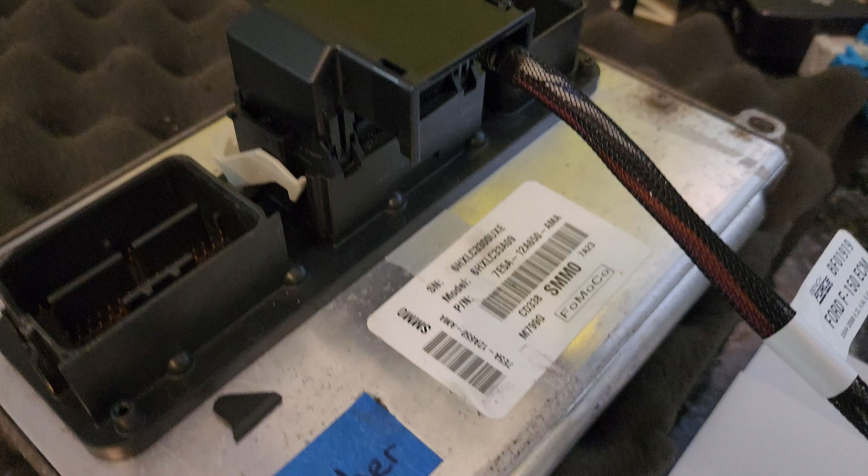Okay, Tanner, the PATS delete is done. Still working on the same SMM0 computer. It's already been forward programmed, and now it's been custom tuned with that custom tune that you and I built, that we discussed over the phone. And I'm starting from scratch with FORScan, so you can see me start it up.

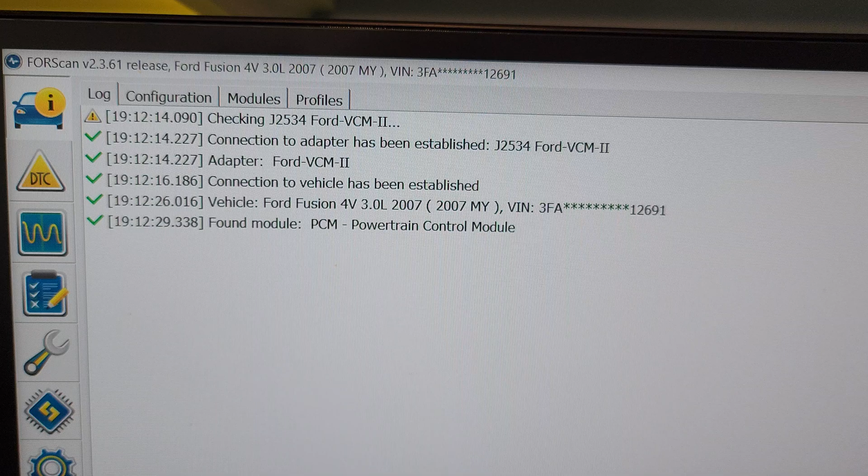Not starting with a specific profile, picking Ford Fusion. And there it's identifying the car. Okay, let's start with the configuration. 07 Fusion, the same VIN 3 times in a row, ending in 212691. Strategy IEAJ OAY. Do I just save this profile? No.

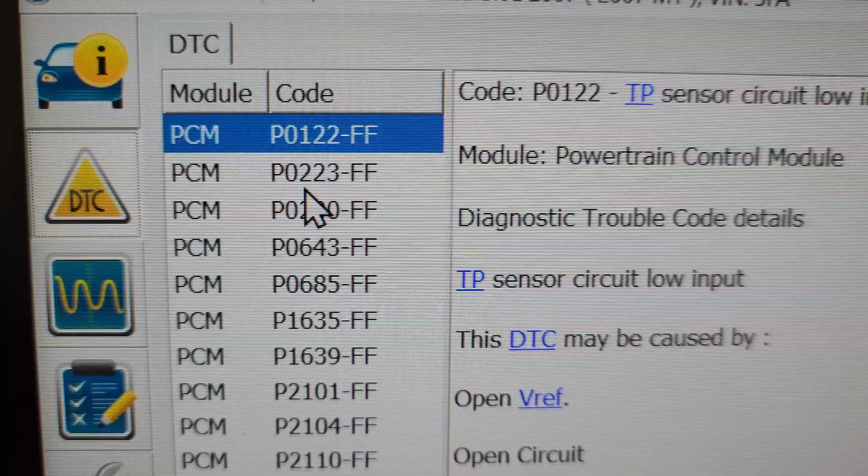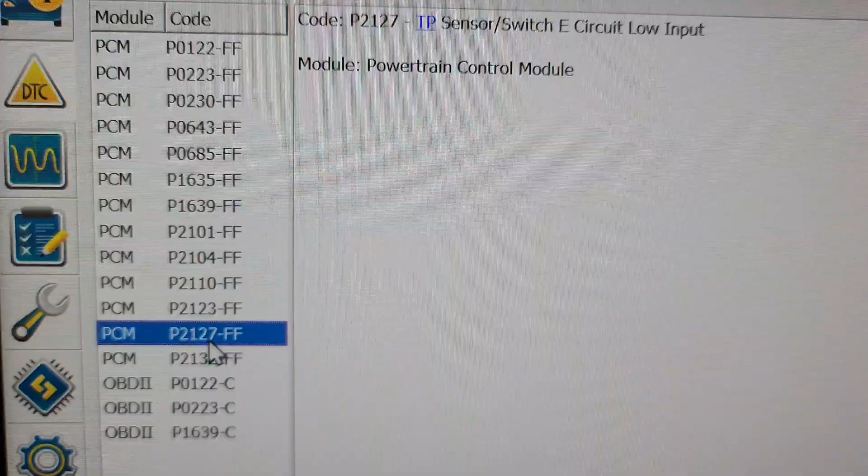Okay, now we're going to go to the codes. Okay. There's nothing here about PATS. No P1260. Then we're going to go to this screen here. We're going to select our PIDs. First, we're going to look for PATS enable, which won't be here.

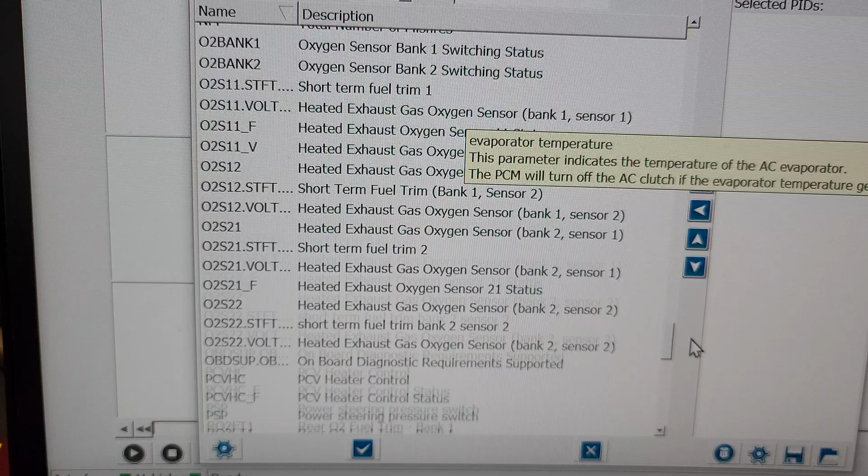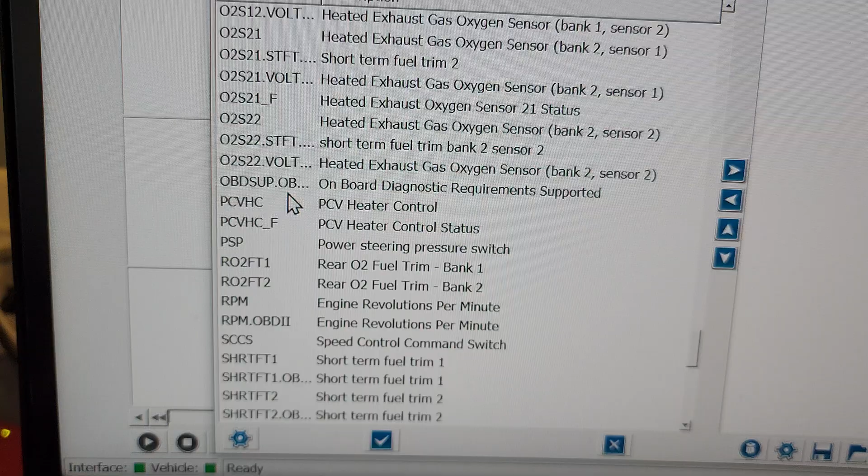Should be right here, but it's not. They're in alphabetical order. It's not there because this computer doesn't think you have PATS, so there's no parameter to choose from with that. Torque source goes to more things than PATS, so torque source is still here. So we select torque source.

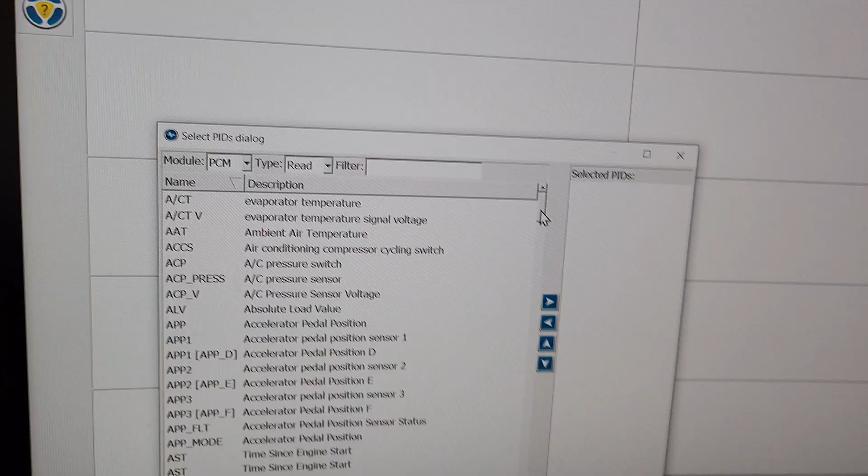And then we hit the... Did I do that all right? No, I didn't. Try that again. Select torque source. Torque control, another name for it. Why is that not selecting? Double click, there we go. And then hit check. Now we got torque control. And as you can see, there is no PATS to choose from. PATS enabled PID just no longer exists.

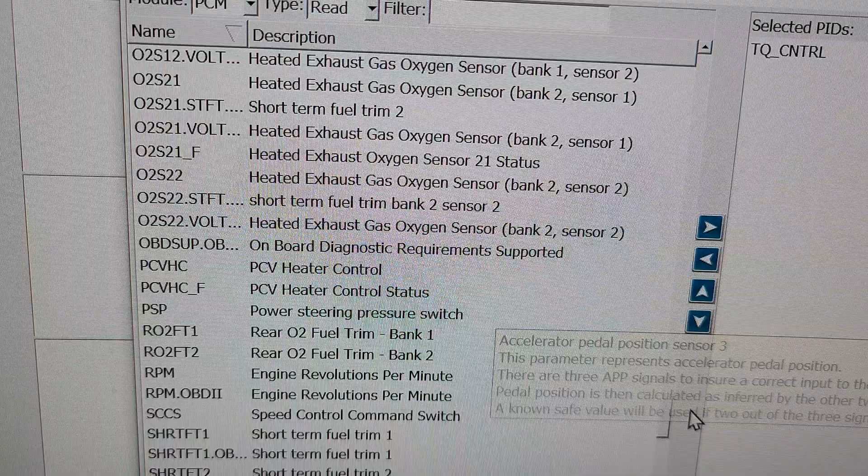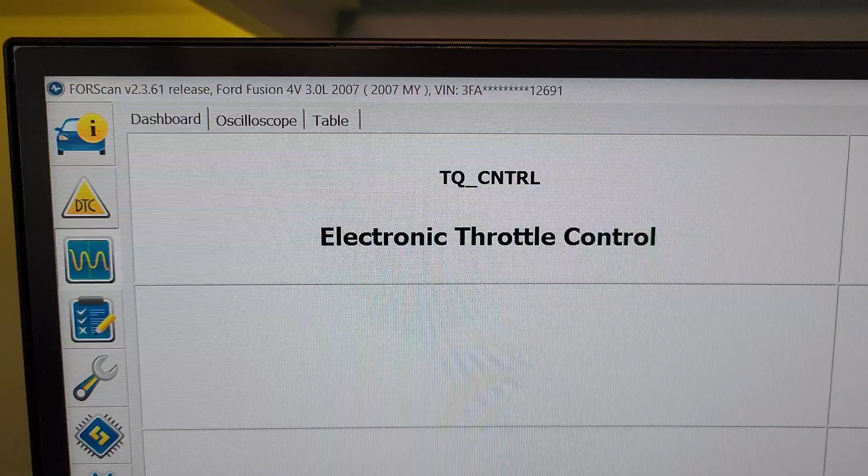Okay. Now I hit play. Stop. Play. Stop. Play. Electronic throttle control. Now, I take notes of this all the time. So here's your first one that we did way back in December 24. You can see the notes. These are the codes that popped. P0600 and U0300, they kind of pop them and flashing all the time. They're not really quite directly related to PATS, but we still check them.

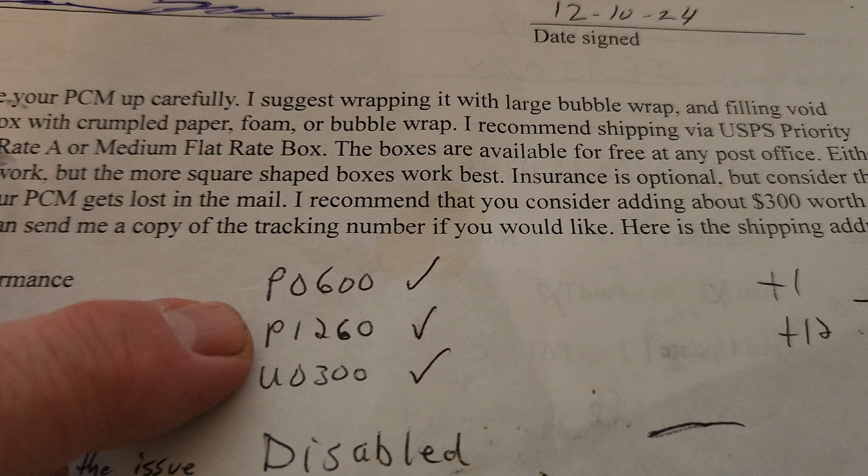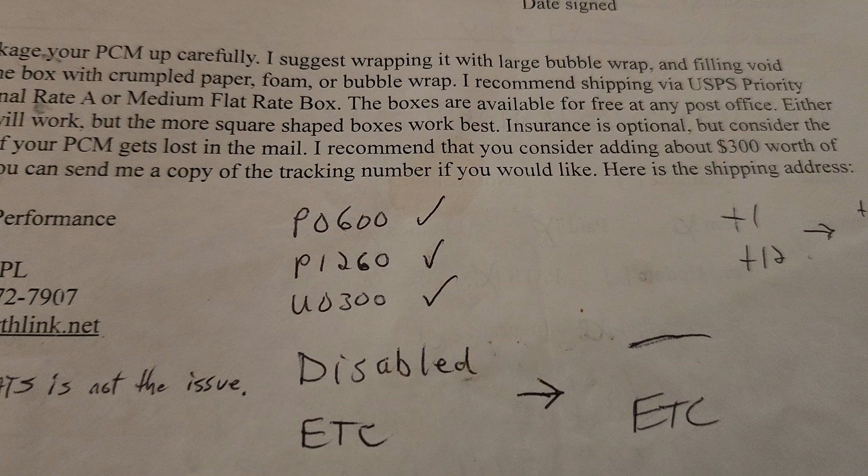Code P1260 is related to PATS, and when I put a check mark there, that means it's no longer there. Went from disabled to blank, nothing there. Electronic control stayed electronic throttle control. That's normal. Okay. Some cars have anti-theft as electronic throttle control, but anyway, nothing there. That's how that was the first time it came.

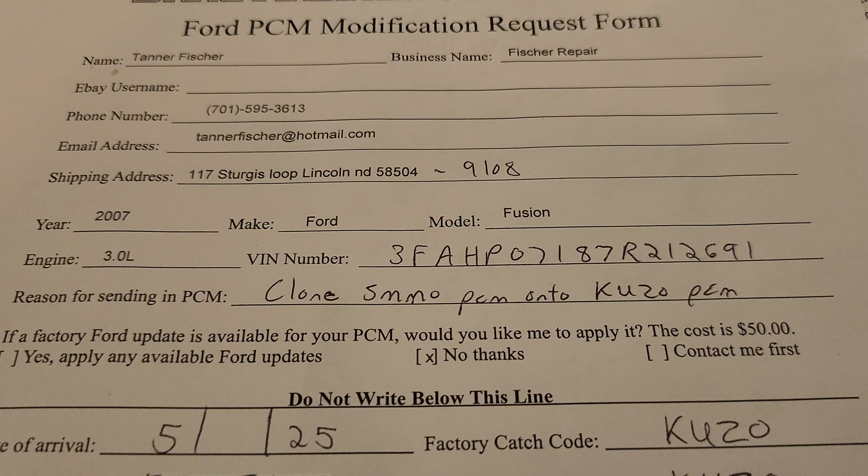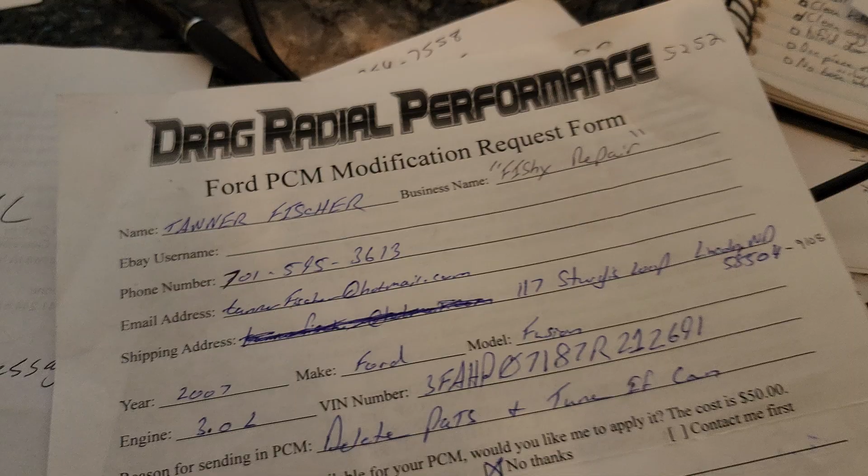Here's the paperwork from the second time it came in May. You can see that I had the same notes on there. 1260 is gone. PATS disable is gone. Anti-theft went to electronic throttle control from anti-theft. So, all gone. Okay. So your two pieces of paperwork. There it is. There's no PATS. There's no PATS parameter to choose from.

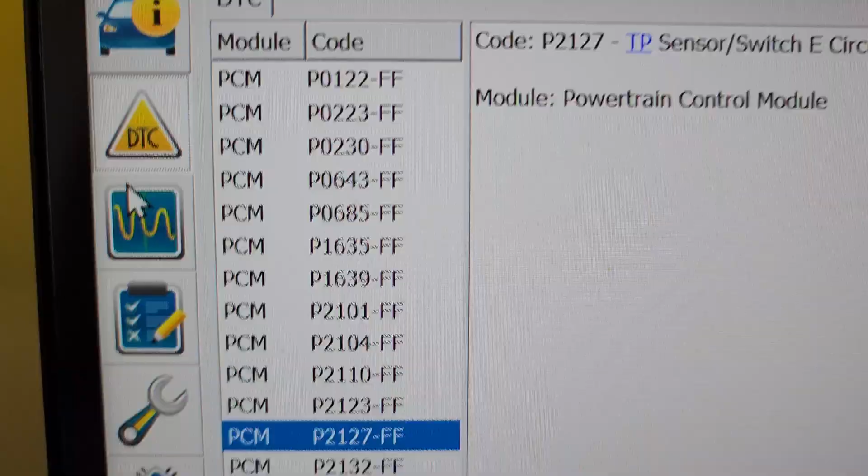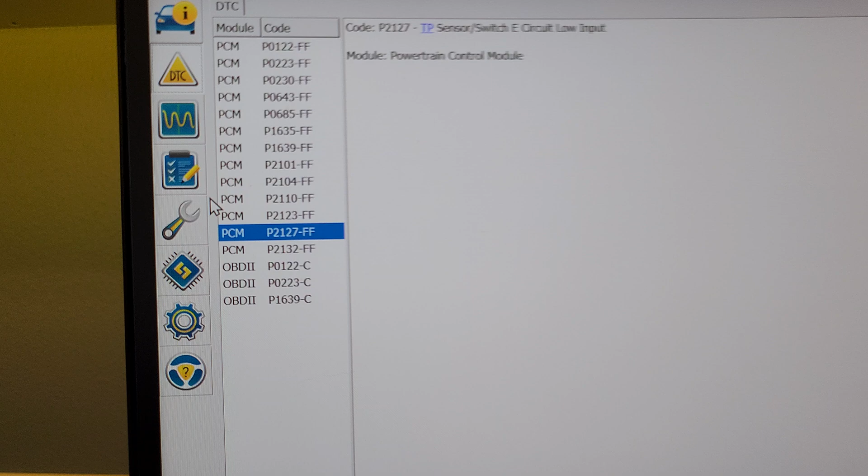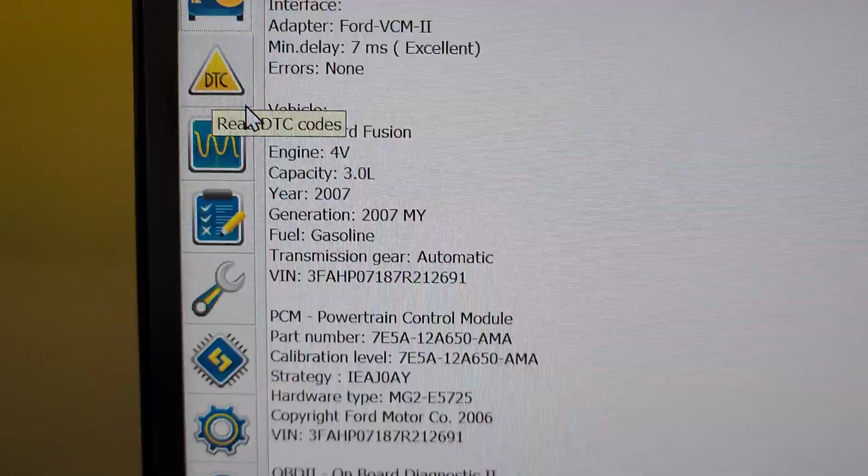Stop logging. Go up here to trouble codes. Well, let's just verify the car again first. See, we're still looking at the 07 Fusion. There's the 3 VINs. Go to the trouble codes. There's no P1260. We'll even clear the codes. Okay, cycle the key off, then back on. Okay, now it's going to pull the codes again.

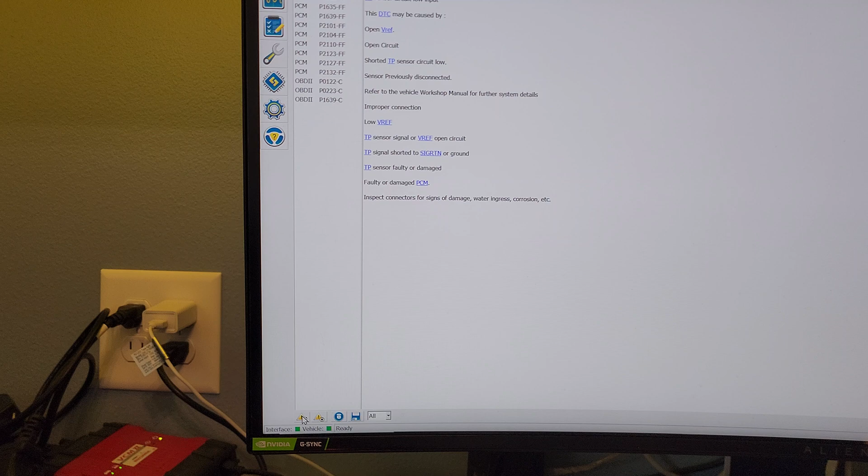No matter how many times we hit this button to check the codes. I'll zoom out so you can see that I'm doing that. I'm checking the codes over and over. You can hear my IDS click when I do that. Checking over and over and over again. No P1260. PATS is absolutely 100% deleted in this computer, and this computer is functional. It's doing things it's supposed to do.

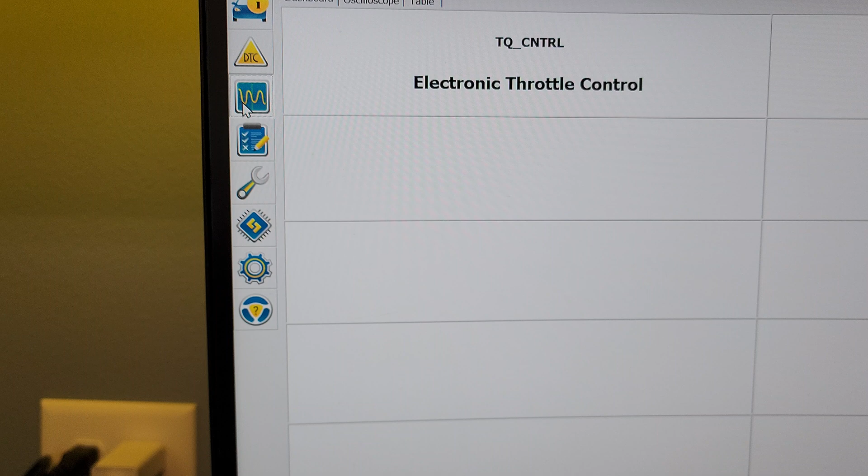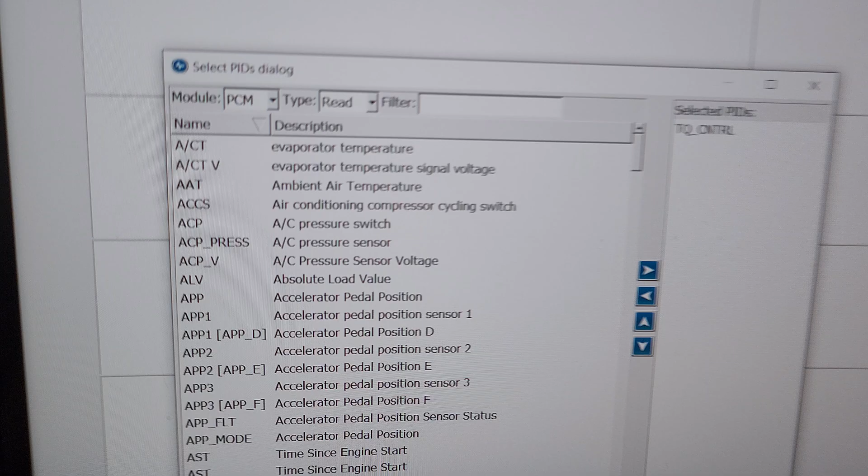For example, I could log other things. So let me get out of the data logging, make sure that's shut off. Okay. Then we'll go to, let's see, reading some codes. Let's look at some other live data. We'll set up a couple of things. Now remember, I don't have any sensors plugged into this computer, so a lot of this stuff's just not really going to work, but

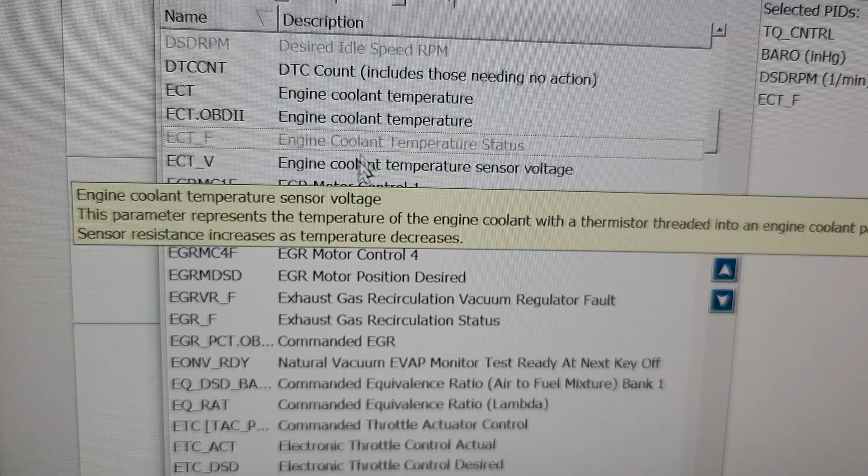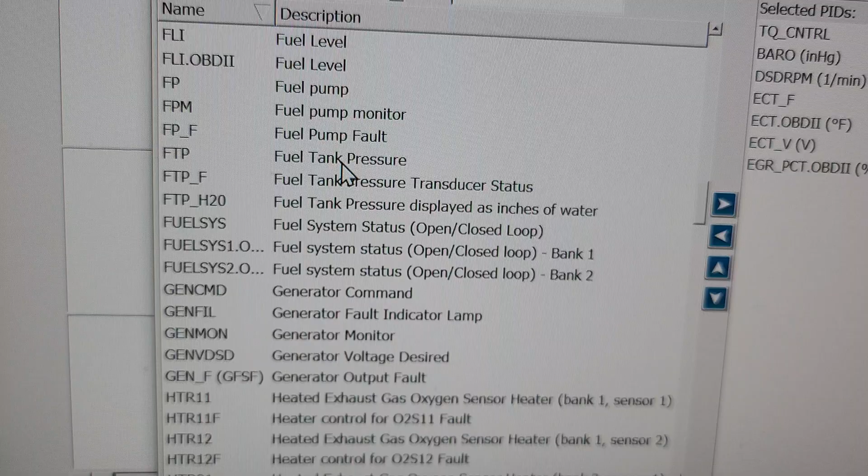we can pick some things like barometric pressure, desired idle RPM, coolant temp sensor status, coolant temp sensor voltage, command EGR. None of this stuff's really going to read right because there's no sensors plugged in, but we can just sort of monitor a few sensors. Probably show substituted values, but there's all the different things I log, right? We'll hit the checkbox. Now our screen has all this stuff on it. Then we'll start the data logger.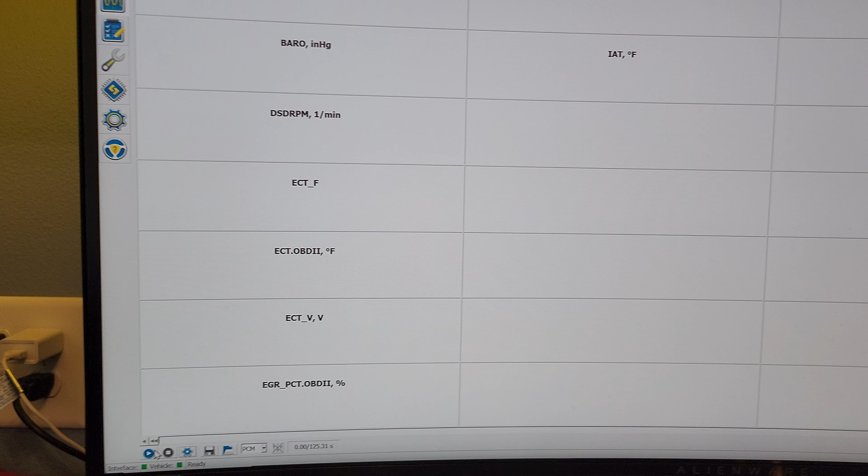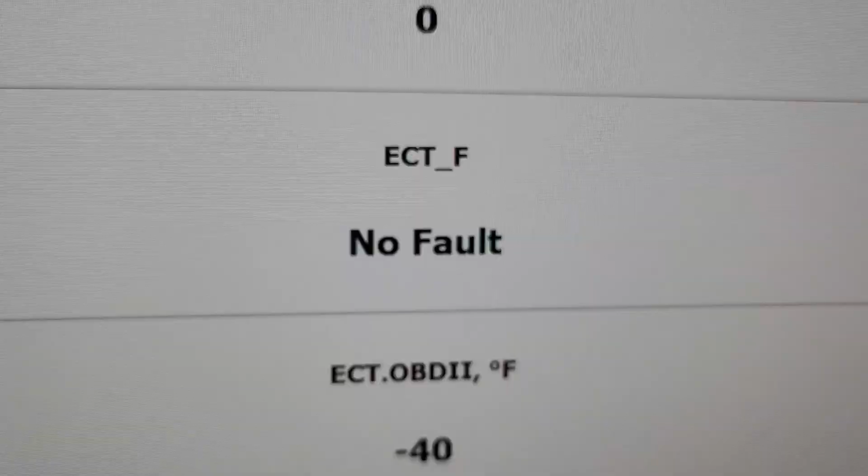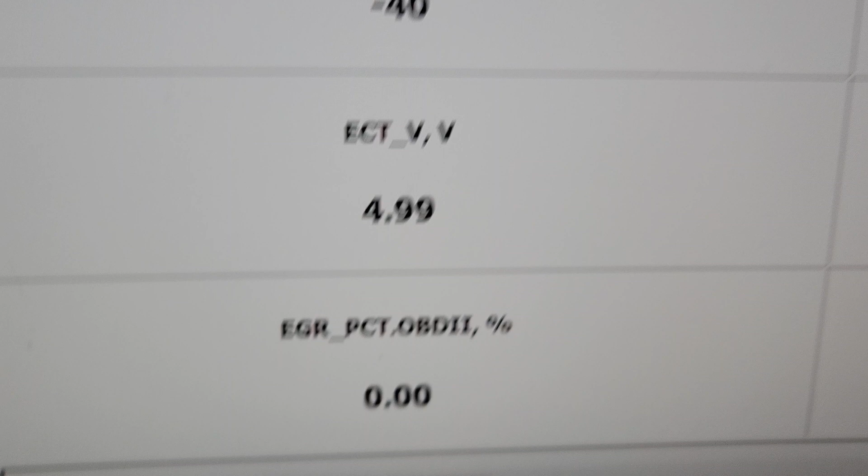As you can see, the computer's substituting that value of barometric pressure for 27.5 inches. I don't know why it doesn't think it has a fault. Maybe if I cycle the key a couple times it will. Temperature is reading -40, which is basically that sensor is all the way up 5 volts, which means it's unplugged. And fuel tank pressure sensor. These are just minimums. IAT at exactly 100 degrees. Those are just substituted values because there's no sensors plugged in here.

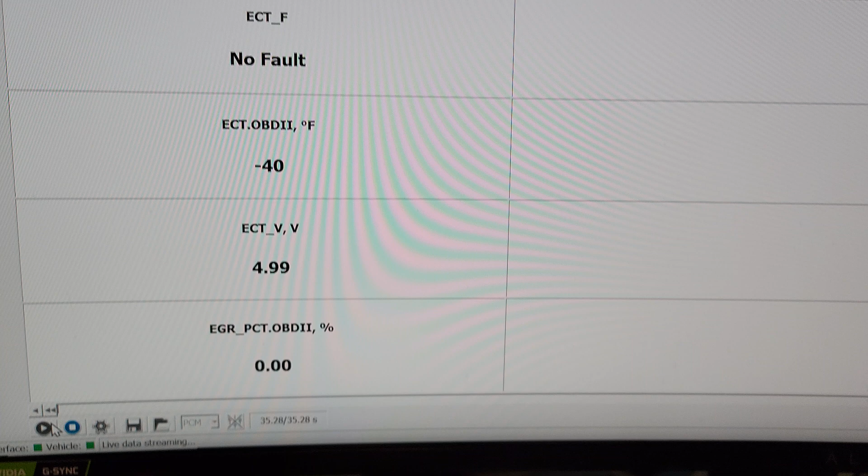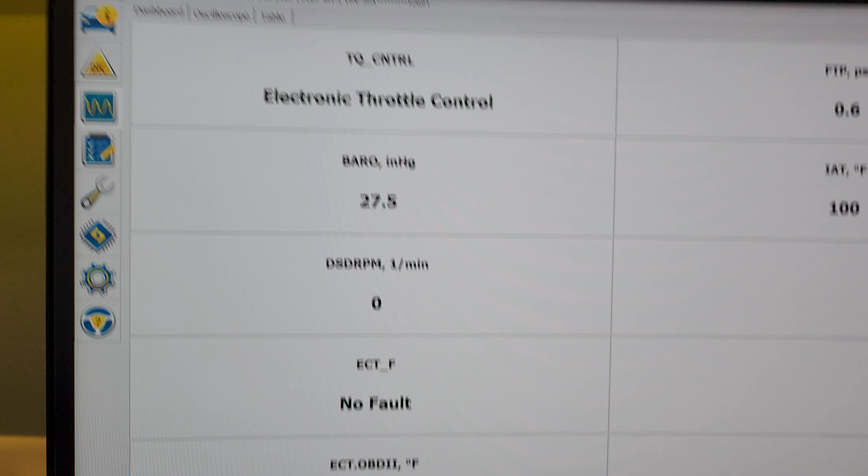But what this shows you is this computer's thinking clearly. It's functioning. It can data log stuff. If there was any sensors plugged in, this would be real data. That's it. There's nothing else. I don't know what else there could be. The computer works. The computer thinks clearly. PATS is certainly deleted. There's a before and after difference in everything we do. And that wraps it up for the SMM0 computer.